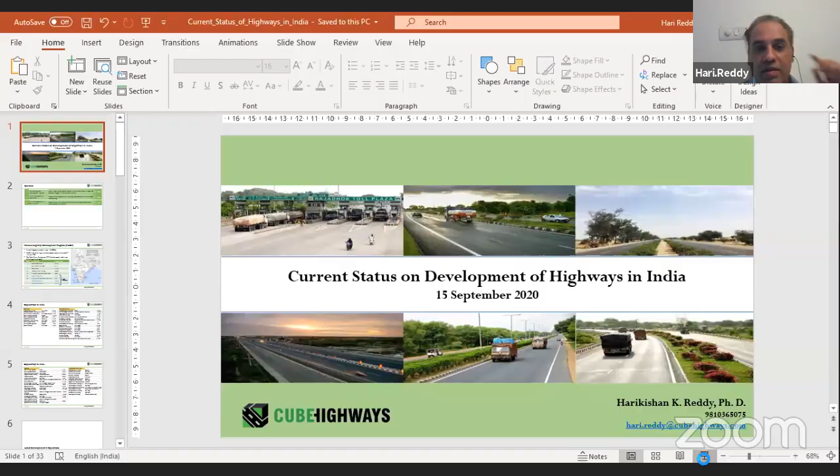I hope everybody can see my screen. So, current status on development of national highways in India - that's the broad topic I had selected, to present what is happening, what will happen, and the scale and size of the highway development we are talking about, not just in the near term for the next few years, but probably in the next 2 to 3 decades. The road building, the national highway building in India, started with a massive and gigantic road building program called the National Highway Development Program.

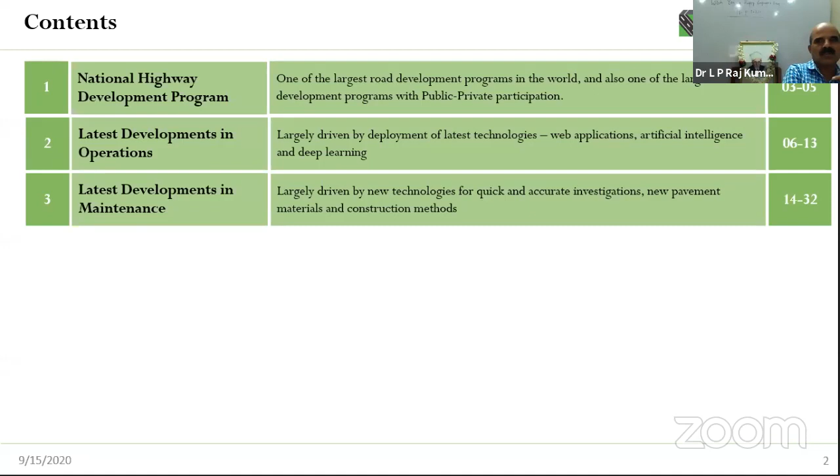It was declared by Honorable Prime Minister Atal Bihari Vajpayee ji, when he was making this speech in the FICCI auditorium, with the plan to develop the Golden Quadrilateral - developing the roads or national highways connecting Chennai to Bangalore, Bangalore to Mumbai, Mumbai to Delhi, Delhi to Calcutta, and Calcutta back to Chennai. That quadrilateral was declared sometime in 1997.

I was in the Central Road Research Institute for a certain activity, so with the head of the transportation department, I was fortunate to attend that conference in FICCI. Everybody, 99% of the people, including people from his own party, said this is another grand announcement and nothing is going to happen. The plan was to build about 5,500 kilometers of road with partial access controlled, completely divided carriageway.

It was a dream then, but it was completed in a defined time frame. Since then till today, we've constructed more than 50,000 kilometers of road network, and probably we have to construct another 100,000 kilometers of road network, including equipping all this network with the latest gadgets and electronics to improve safety on Indian roads.

As we speak, Indian roads are the second largest reason for deaths in India - all diseases and age put together, and after that, roads kill the highest number of people. So therefore there is enormous amount of work yet to be done on improving the safety of our national highways. I'll present some brief statistics on NHDP and other programs underway now to present the scale and magnitude of highway construction taking place.

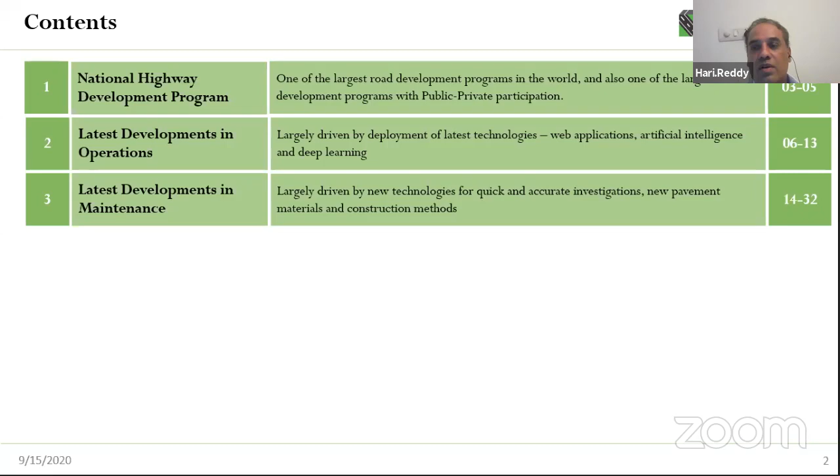This should give enough motivation to all these youngsters on the call to pursue careers in highway engineering if that interests you. We'll also go over the latest developments we are bringing into the Indian road sector, and some latest developments in the maintenance of highways. Once we construct a road network, the next target is to ensure a certain level of service is offered to the road users.

The screen presents the road development program we have undertaken in the last 2 decades under the National Highway Development Program, NHDP, and its subsequent wings. As I said, it started with development of the Golden Quadrilateral connecting 4 large metros - Chennai, Bombay, Delhi, Calcutta. After completion of that, another massive road development program called North-South-East-West. So if you see in the map, the yellow line connecting these 4 metros is the Golden Quadrilateral.

With successful completion of this program, the 2 important corridors were taken up: North-South, starting from Srinagar going up to Kanyakumari, and Porbandar to Silchar East-West corridor. This is shown in a little dark brick color for the North-South corridor, and greenish for the East-West corridor. That is also complete now.

Then we moved on to a 12,000 kilometers of road network with private sector participation, where a private entity brings in funds, operates and maintains the network over a period of time, generally 20 to 25 years, called a concession period. During that time, the private player, for developing as well as operating and maintaining the project, retains the toll collection, or in some concessions the government pays annuity, which is equivalent to the EMIs we would pay on a home loan or a car loan.

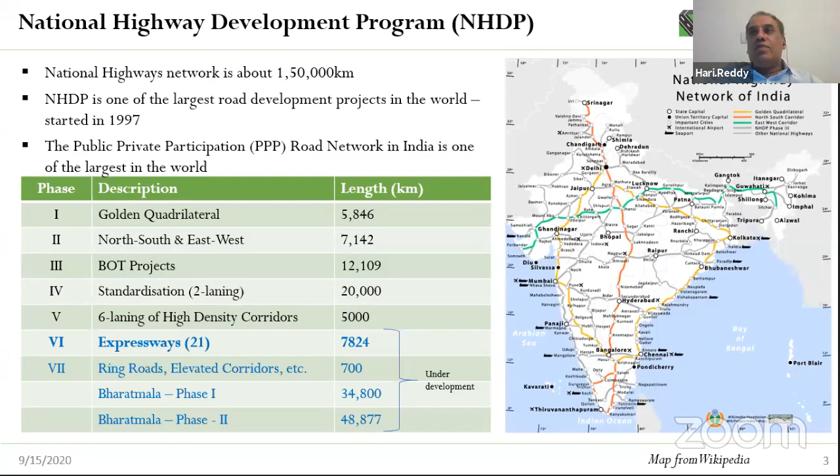And phase 6 is basically expressways, which are fully access controlled, where road development will be truly multidisciplinary, where engineers with computer science, electronics, civil engineering, chemistry - all backgrounds have to work to create a sustainable infrastructure. Just touching base on expressways.

A large number of expressways are already constructed. For someone from Delhi to Agra wanting to see the Taj Mahal, earlier it used to take 5.5 to 6 hours in one direction. So people used to start around 4 o'clock in the morning, and after visiting the Taj Mahal, come back to Delhi at midnight or 1 o'clock. Today, from Delhi to Agra, someone can travel probably in about 2 hours. So there is an expressway connecting. Like that, there are a large number of expressways already constructed.

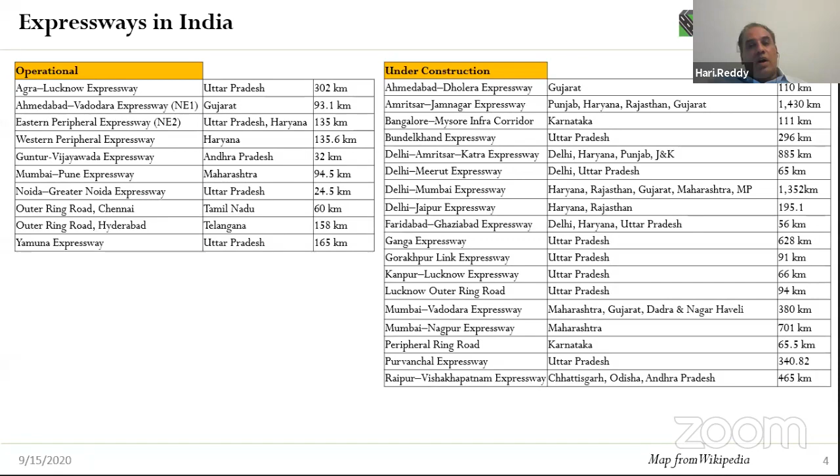While the current government plans to complete this in the next 4 to 5 years, I think this current construction program takes approximately the next 1 decade from now. So therefore, an enormous amount of engineering input, engineering skill set, and technical and non-technical workforce is required to complete these projects. Today, in this gloomy time, infrastructure, particularly civil infrastructure, is one sector substantially providing employment to people in these tough times.

So we'll get to some latest developments. This gives a little bit of a flavor of where we are heading. As I said, transportation or highway construction is no longer pure civil engineering. There is an enormous amount of technology being dumped into highways every day to ensure that the road user gets everything they're looking for, and every stakeholder gets the information in real time on what they're looking at.

Many of you would have seen when you cross a toll plaza on a highway, you get to your wallet and pay cash. Today we are moving to cashless transactions, a whole lot of cashless transaction schemes. That's what we are working on. So enormous technology is being used to ensure transactions at toll plazas become faster and give that level of service to the road user.

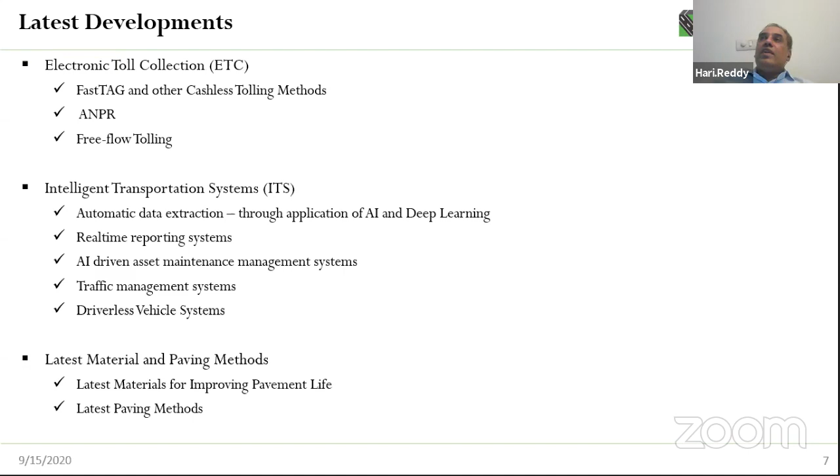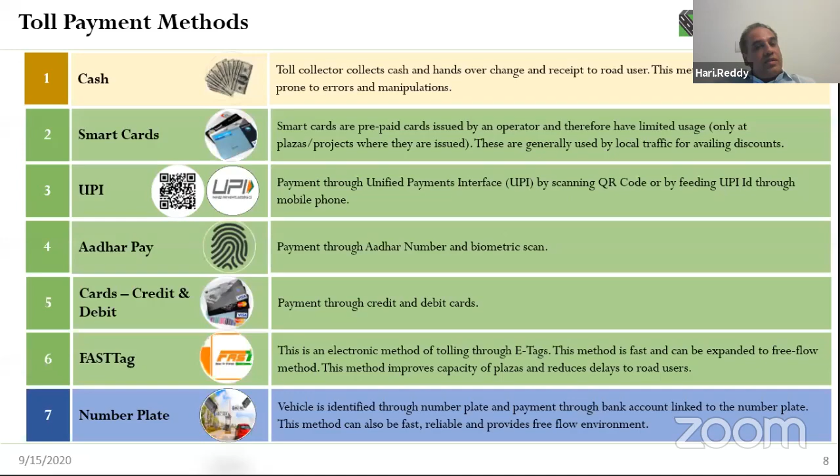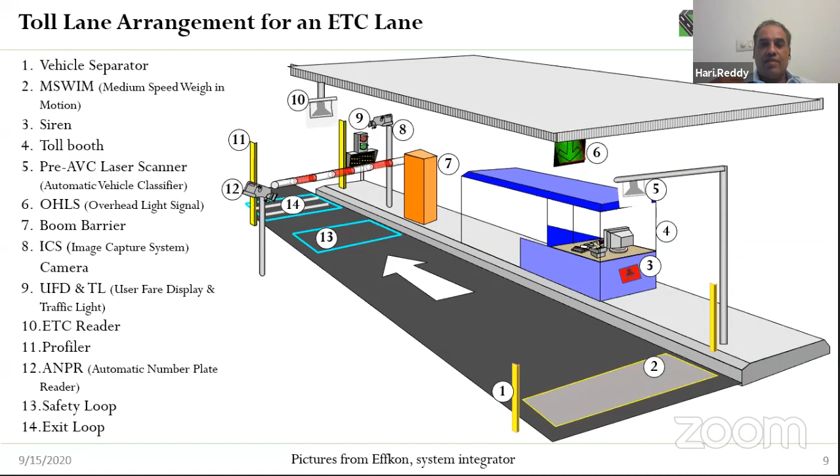As I said, out of the methods at a toll plaza, we always used to pay cash. So we have smart cards today, we have UPI - unified payment interfaces through mobile wallets. A person can pay through Aadhaar Pay, or through cards, credit as well as debit. Then there are FASTTags and number plates. So this is some architecture - I'll circulate this later. A vehicle comes, it automatically identifies the vehicle, deducts money, and you can go away.

Just to present a few snapshots in terms of what all engineers of all specializations put together - the intelligent transport system brings all the information that is on a road to a centralized place called a control center, processes the data, creates information, and sends it to all stakeholders.

For example, there is an accident on the road. If somebody travels to North India in December or January, there's a lot of fog, there's a breakdown vehicle, visibility goes down, and civil engineers understand your stopping sight distances are not available. So somebody comes at speed and bumps into that, and then somebody else bumps into that too. Last time on the expressway between Delhi and Agra, there were 80 vehicles piled up in one accident.

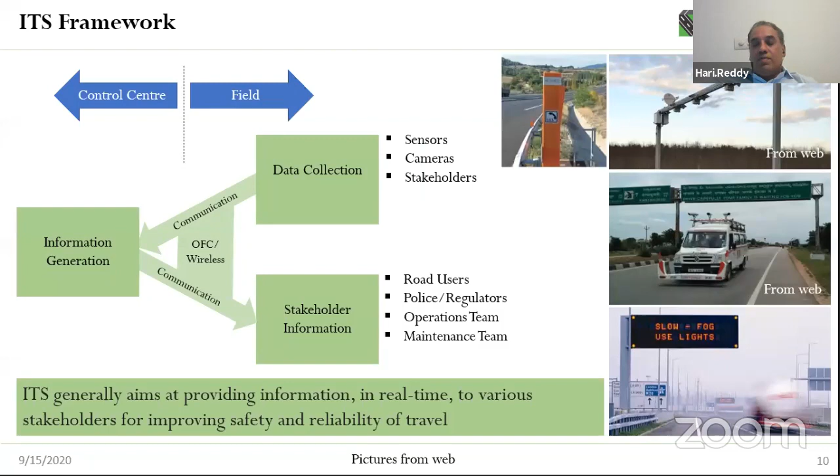So how do you send this information in real time to road users that there is an accident ahead? There is enormous technology being used through sensors, cameras, and today mobiles too. You create a channel where somebody can send information that there's an accident. It goes to the information center, which is a control room, comes to the field, and decisions are given to road users and all stakeholders to react to.

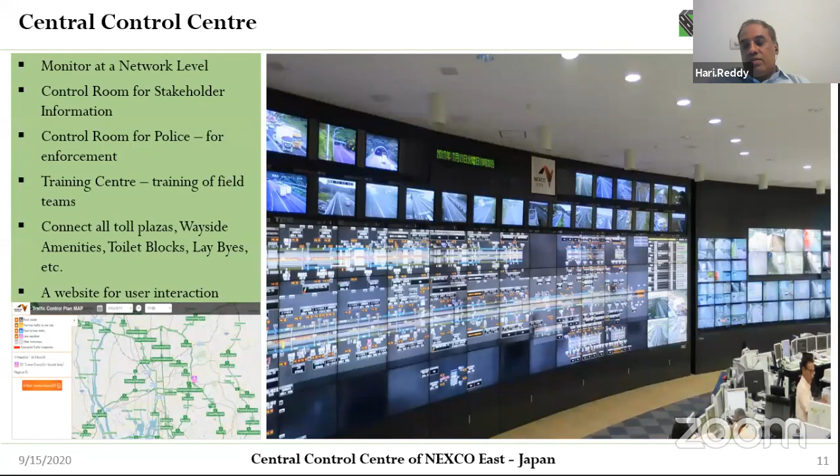So you are able to spot and address it much before you actually find a pothole on the road. The middle screens present the traffic situation - congestion, accidents, breakdowns, unauthorized parking, somebody coming in the wrong direction. Everything is in real time, and this is not fiction or a story - this is being installed on Indian national highways.

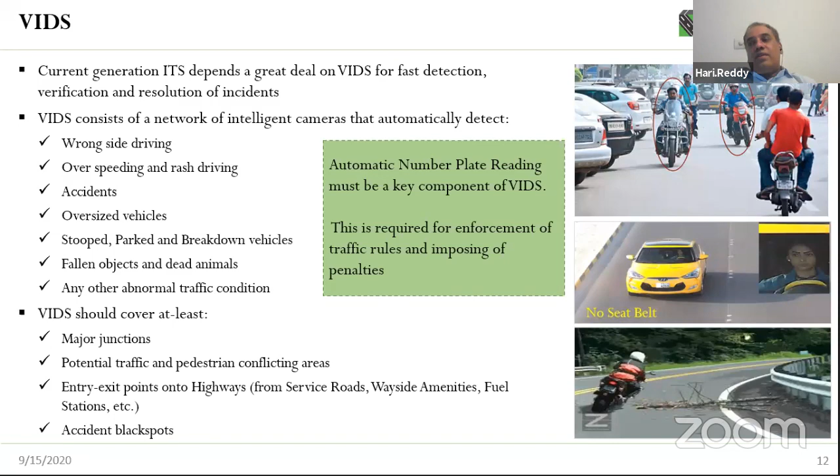You can send a challan to the vehicle owner's house. There's a site in India now called Vahan, where basically every vehicle is registered. If your vehicle's address is not found in the Vahan database, your vehicle will not be allowed to travel. So there's a lot of things happening with VIDS.

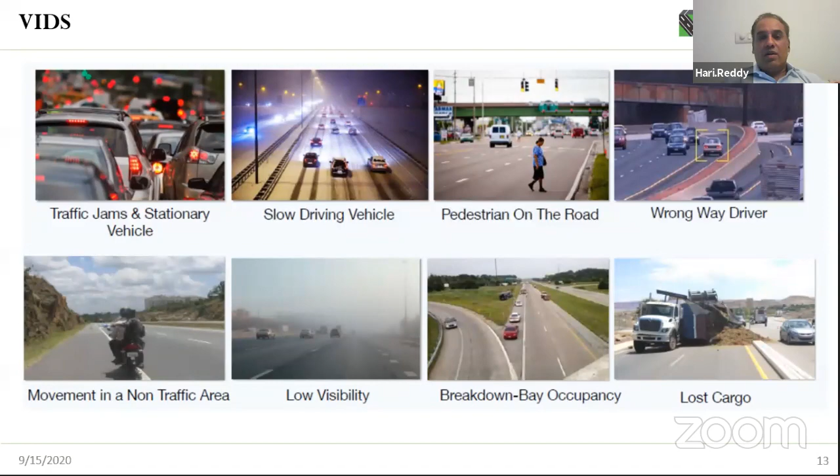So we'll get quickly to what we are doing on maintenance. Typically in India, till about 5 years back, somebody had to inspect the road and see what the problem is, and decide what needs to be done. Now we are moving to a completely instrument-based approach.

When I studied at a government junior college in Hanamkonda, there used to be a big hill right next to the college where I did my 11th and 12th class, what we used to call intermediate at that time. Recently I was going there and that hill had vanished, it's not there anymore. Similarly I see so many hills are not there. Where did they go? Basically people crush those mountains to create aggregates and construct roads.

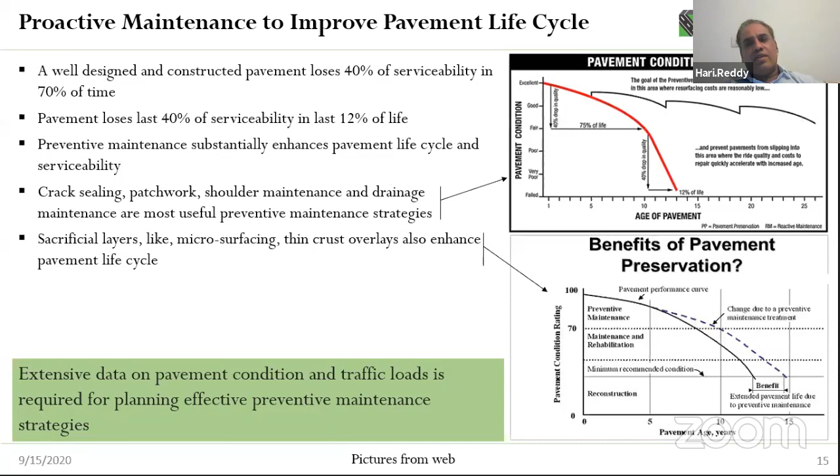After 5 years or 3 years, the road goes bad again, so you crush another mountain and rebuild it. So there's tremendous technology penetration needed to conserve these resources. By taking care of the road with timely interventions, you reduce the pressure on these resources, and we are also getting into recycling. There are so many technologies, which I'll present later, for how you can actually conserve these resources.

All of this is being practiced on Indian roads. This is not something we just picked up from what others do. So, the quality of engineering today is almost at par internationally. In terms of planning, we are probably a little bit lacking, but we will catch up very soon. Overall we are at par with the international industry.

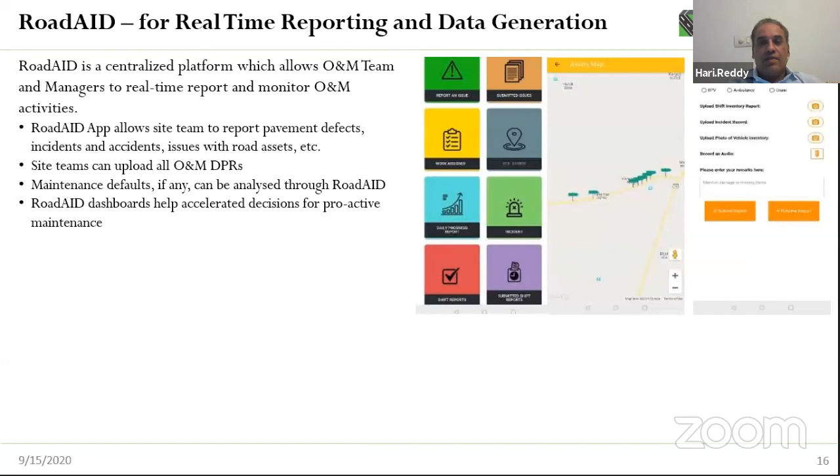There's something we deployed at Cube called RoadAID. This is a mobile application through which anybody can report anything - a signboard missing, a pothole, rutting, raveling on the road, waterlogging, or a signal not working. A person can pick it up, and whoever reports it, you can see on the picture, a maintenance engineer or operations person can go and repair or replace it. So it is real time.

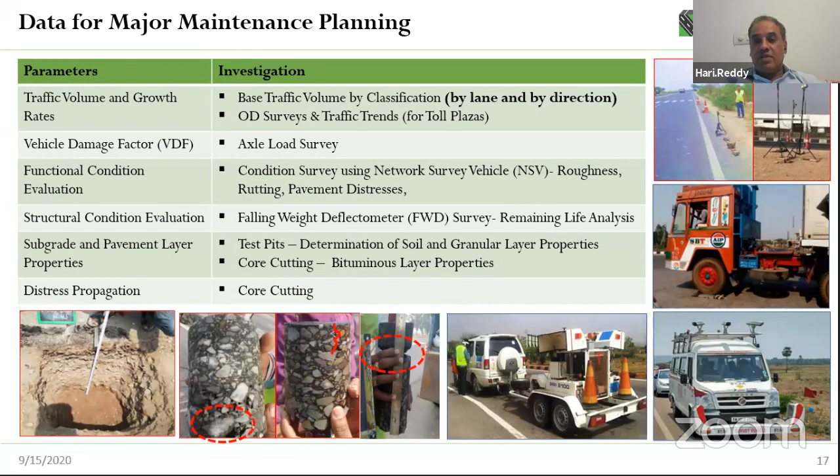Now you can actually predict that condition without actually getting into dismantling. These are called non-destructive testing methods.

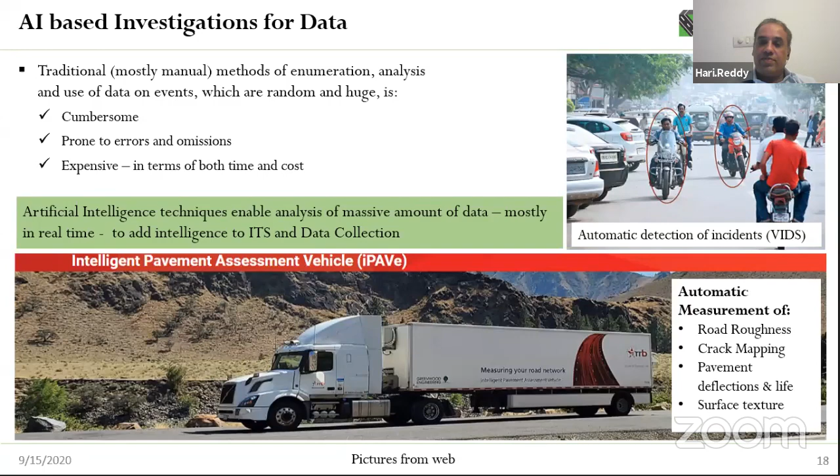In civil engineering, we are now using enormous amounts of artificial intelligence and artificial neural networks to identify issues in traffic flow and on the road. We have used and are using genetic algorithms to predict the bottom layers' characteristics without actually digging the layers. We are using fuzzy logic, building algorithms to automatically determine what treatment should be applied for a given condition. Boolean logic doesn't work because you need a very large number of rules, so we're moving to expert systems and fuzzy logic to automatically create maintenance budgets and maintenance intervention processes.

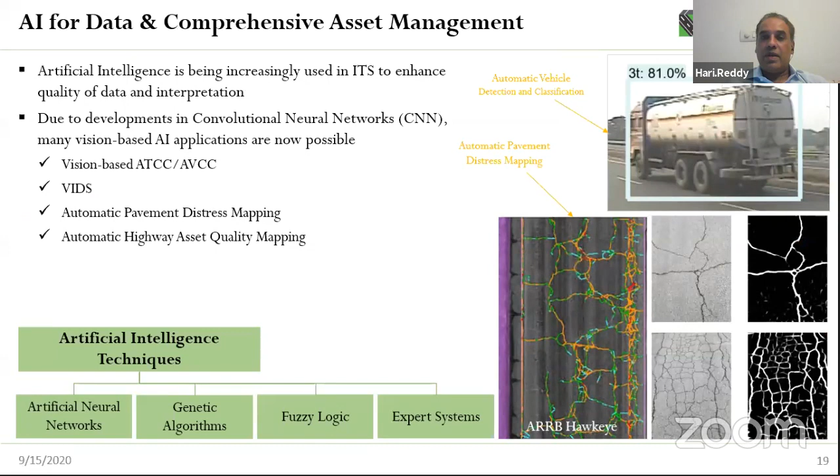This is contrary to the government hypothesis that we should create work. Of course, this technology is disruptive, it's going to take away a lot of jobs, that's for sure. But of course, it will create many more things that we can do.

So there is a nice video. Let me check my time, because I'm already... I have to leave.

This is something which we created in this country. Every time a vehicle goes, it counts and classifies and presents the data. This was built by me and my son, an opportunity COVID gave us. My son is a computer science graduate, so he was at home, and I said, what will you do in these two months? I said, why don't you develop this?

A truck goes, it's a 3-axle truck, in lane 1. On the right-hand side, this is a dream for a pavement engineer, this data. In lane 1, at 9 o'clock, 19 seconds, a 3-axle truck went, with an axle configuration of 1, 2 - front axle 1 and a tandem axle in the back. Every time a vehicle goes, it's printing this, and there's absolutely no intervention here.

The whole highway industry, not only here but across the world, suffered because we did not have data. So for the first time, through these applications of artificial intelligence, we are able to create this data. This whole AI engine is created by the people at Techniche, which TRD represents. He's going to speak next on structures, cube highways, and our own thought process.

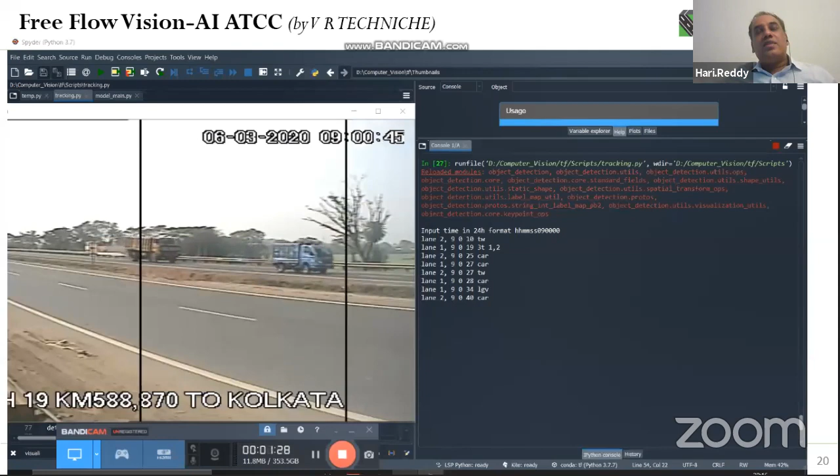There are some more slides I will share, but I don't think we have time to go through them. For all the young engineers or youngsters on this call, you need to know what is for you as a civil engineer. You don't have to join a software company and write code, an Infosys or a Wipro or a TCS, writing code completely unrelated to engineering. There is a huge amount of engineering happening, and this sector continues to provide enormous opportunity for you to express your mind in terms of your intellect and your ability.

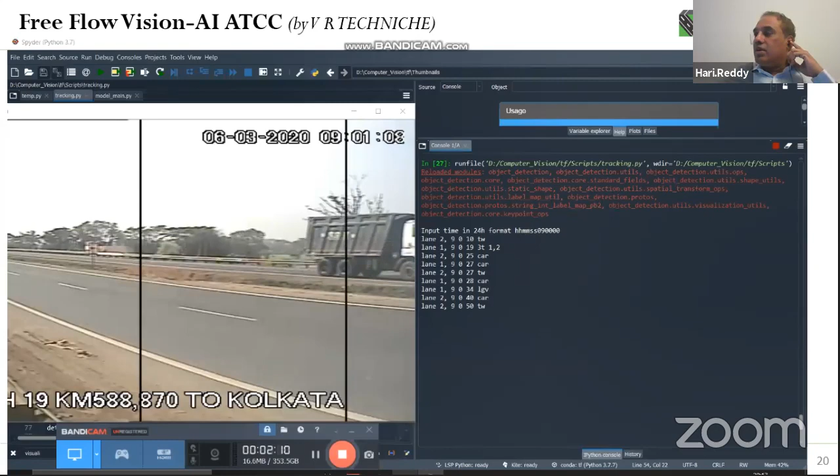So I'll conclude my presentation, and I thank Kakatiya University, Professor Mallareddy, and the other civil engineering faculty for giving me this opportunity. If I had time, I would have spoken about many more things, but this is not the end, so I can come back and have a focused discussion for students whenever you wish.

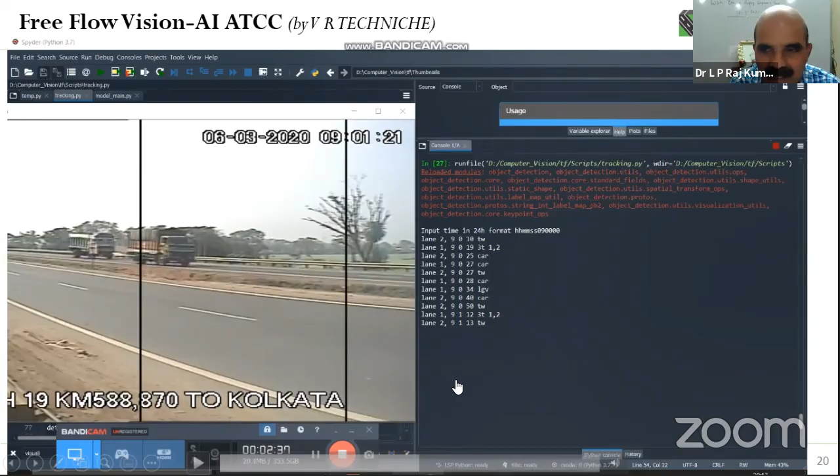Now I request TRC Reddy to present his contents. Dr. Hari has a meeting in the Ministry of Transportation, so he has to leave. Otherwise I would be online, I'd be hearing, but I'll keep myself on mute since I'll be in a vehicle and it might disturb. So I'll be there for the rest. Okay, thank you, Dr. Hari.

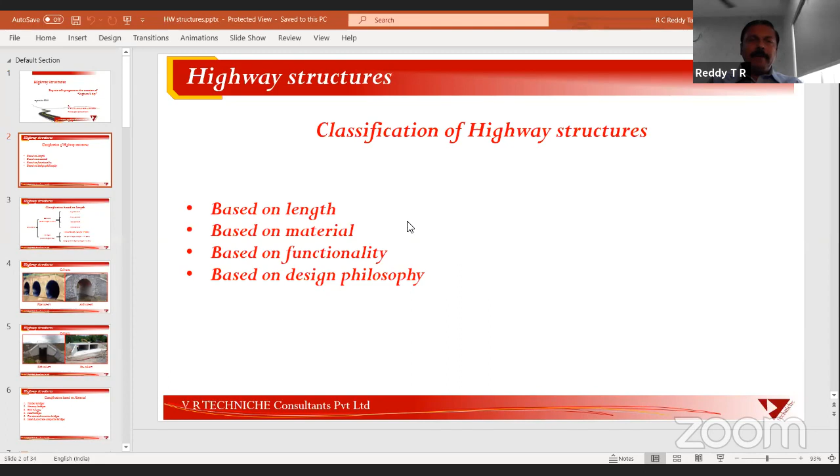First of all, the highway structure can be a bridge, a culvert, or an underpass. I'll explain the classification in subsequent slides. A bridge is a linking between two pieces of highway to overcome an obstacle — it can be a river, another village road, a major district road, a railway line, or a valley. Based on the functionality, the classification is given.

As per the IRC code, IRC 5, highway structures are classified into two broad categories — culverts and bridges — based on their total length. If the total length is less than 6 meters, it is called a culvert; if more than 6 meters, it is called a bridge. The bridge can further be minor, major, or long span, depending on the total length of the bridge, not the span.

In culverts, there are 4 broad types used in our highways across India: pipe culvert, arch culvert, box culvert, and slab culvert.

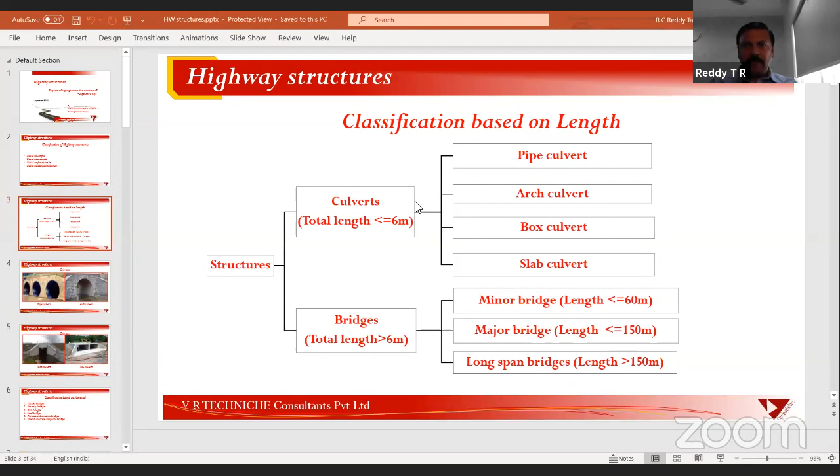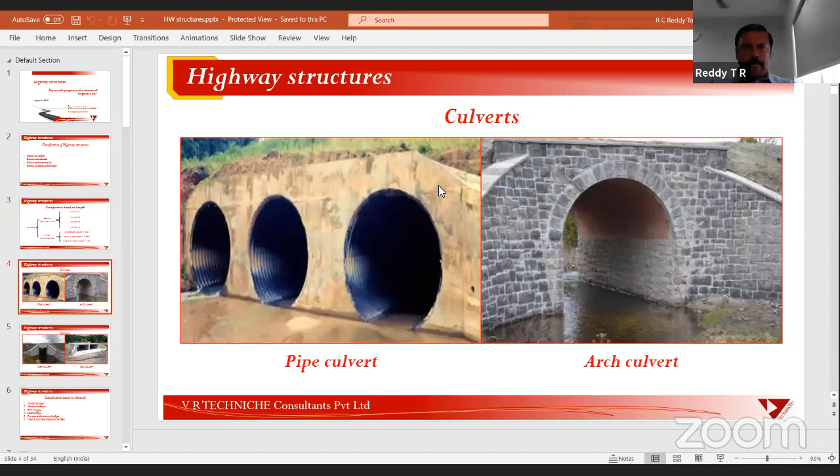A slab culvert differs from a box culvert in that the top slab is not monolithic with the abutment walls or side walls — it is simply supported on the side walls, so it's called a slab culvert. Our old structures are mostly slab culverts, whereas now, for economy, current-day concessionaires and EPC contractors are going with box culverts.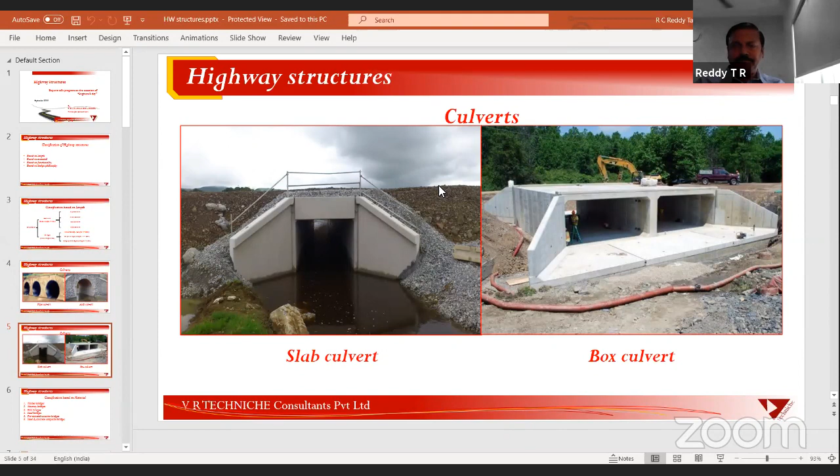Bridges are mostly classified broadly based on the material used in the bridge. It can be a timber bridge, but timber bridges are mostly used for temporary conditions. There are also masonry bridges, RCC bridges, steel bridges, pre-stressed concrete bridges, and steel and concrete composite bridges.

Even today there are several masonry bridges — it's like a composite structure where the substructure foundation is masonry and the superstructure is a solid slab. Such structures exist across India in several thousands.

Then RCC bridges, as usual, are a predominant category on Indian roads. And steel bridges — the choice again depends on the span, availability of material, and the time span for construction.

For pre-stressed concrete bridges, if the span is more than 25 meters, most concessionaires and EPC contractors resort to pre-stressed concrete I-girder bridges. There are also steel and concrete composite bridges.

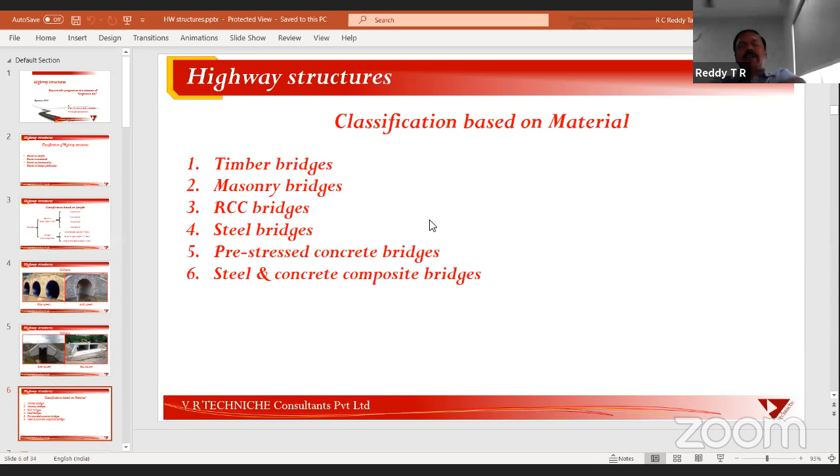For railways, it has recently been made mandatory that the obligatory span — the span crossing the railway line in ROBs — should invariably use steel girders placed below a composite deck slab. So steel and concrete composite bridges are widely used for railway bridges, particularly ROBs.

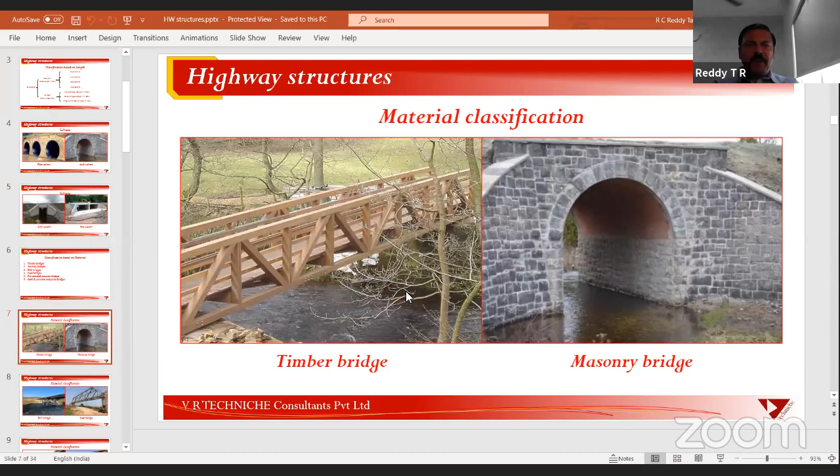This is a typical example of a timber bridge and a masonry bridge. Then the RCC bridge on the left side of the slide, how it looks is a column type piers and girders, deck slab, and the steel bridge.

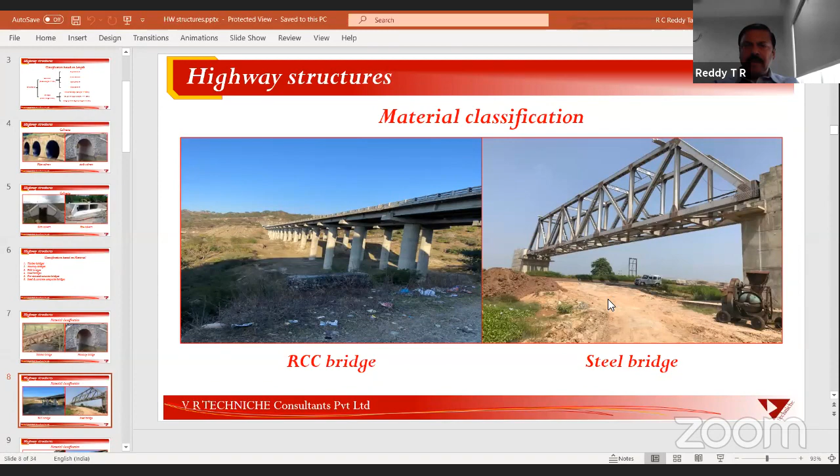The pre-stressed structure looks similar to RCC bridge. Only thing is, if the span of the bridge is more due to the requirement, then the depth of girders will be considerably high, which results in rise in the embankment height and a reduction in the clear height available for the water flow or the headroom for the vehicles. So we will resort to the pre-stressed concrete girders.

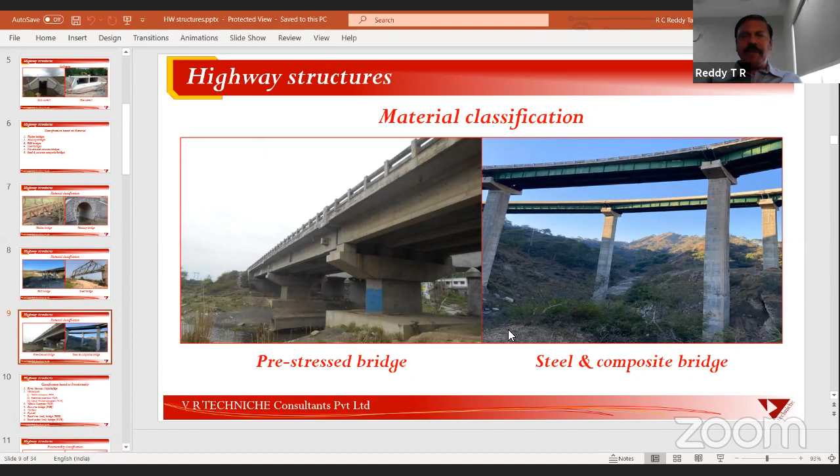Then the steel composite we use for long spans and lightweight, so particularly like in valleys in Jammu region, they mostly use steel composite structure so that the lightweight can handle lifting very easily at such large heights.

Then the classification of structures is also done based on functionality. If the bridge is constructed to cross a river by the road, it is called a river bridge. Again, it can be major, minor, or large span bridge, depending upon the total length and span.

Then the underpass. It can be vehicle underpass, predominantly used for vehicles, and pedestrian underpass, cattle or wildlife underpasses. We have constructed elephant underpasses in Orissa, and camel underpasses in Rajasthan. That's why authorities insist on constructing wildlife underpasses in forest zones or wherever there is data about wildlife crossing the road.

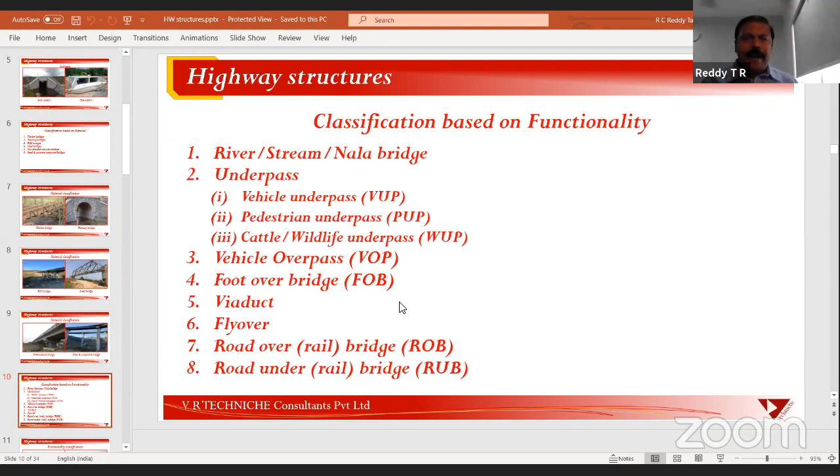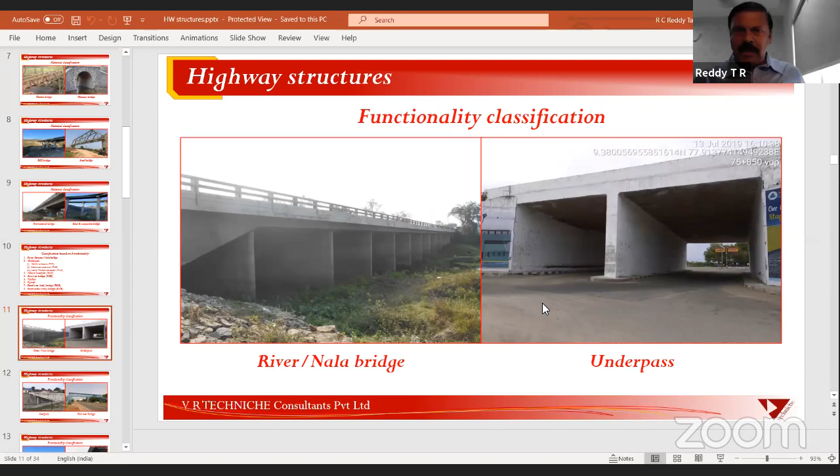A few examples and photographs: on the left side slide is a river bridge, and on the right side is the underpass - a 2-cell underpass for bidirectional traffic. Then the overpass, where the project road goes down and the cross road goes above the project road - that's the overpass. Then the pedestrian overbridge with a steel truss bridge.

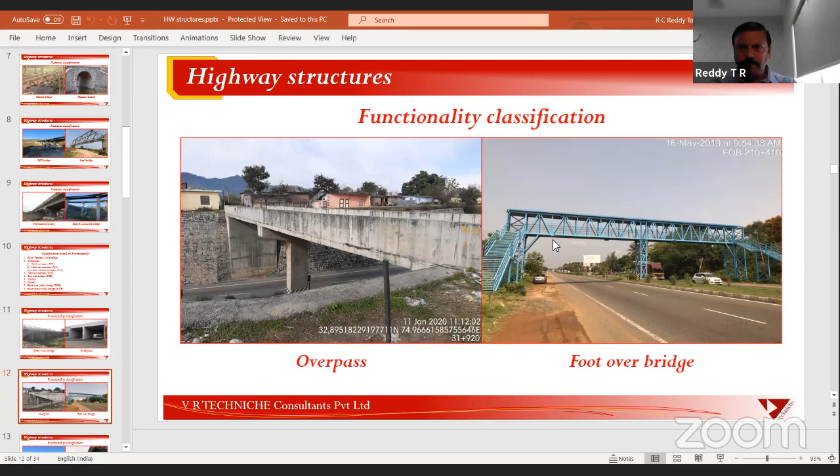For pedestrian bridges, mostly we choose steel truss bridges because of its simplicity and ease to erect without closing the live traffic, except blocking the traffic for a few hours in the night time.

Then the viaduct, you can see, is used to cross a huge valley. It is there, I think, in Gujarat. I think we have done a due diligence for this project.

Then it's a flyover in urban areas where the busy junction is to be crossed by the high traffic road. A flyover is constructed either for unidirectional or bidirectional traffic.

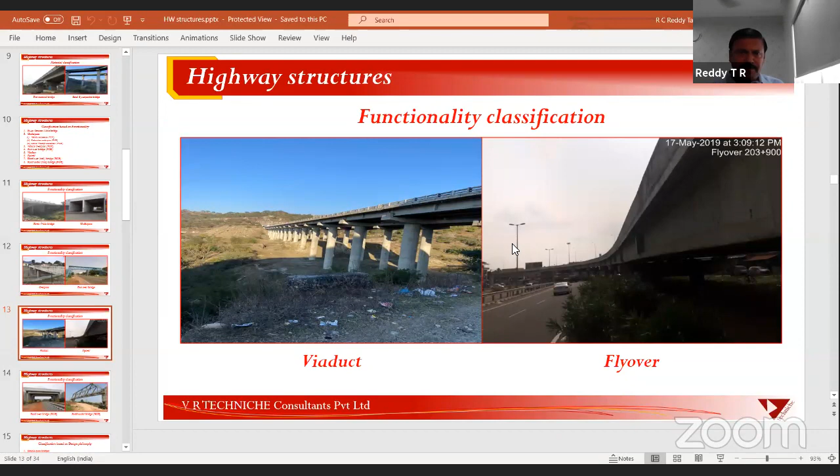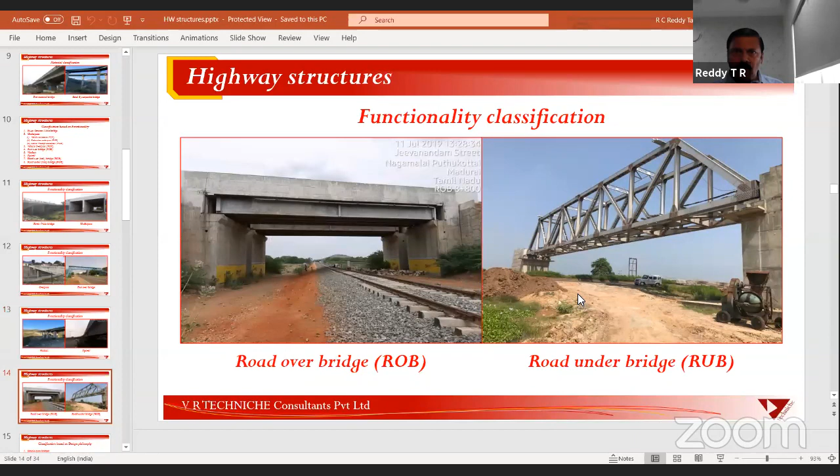Then the ROB, the left side photo is the ROB, road over rail bridge. The right side is RUB. Above, the rail track is passing on top, and the road is going down. Then comes the final classification, based on design philosophy.

Whether it is a simple span bridge, a continuous bridge, an integral bridge, arch bridges, suspension bridges, cable stayed bridges, or extra dosed balanced cantilever.

Simple span bridges are widely used in our highway construction because of their simplicity in construction, design and implementation. It is like the construction of two piers or abutments and placing on it a superstructure of slab type, or girder and slab type, or wide slab, anything.

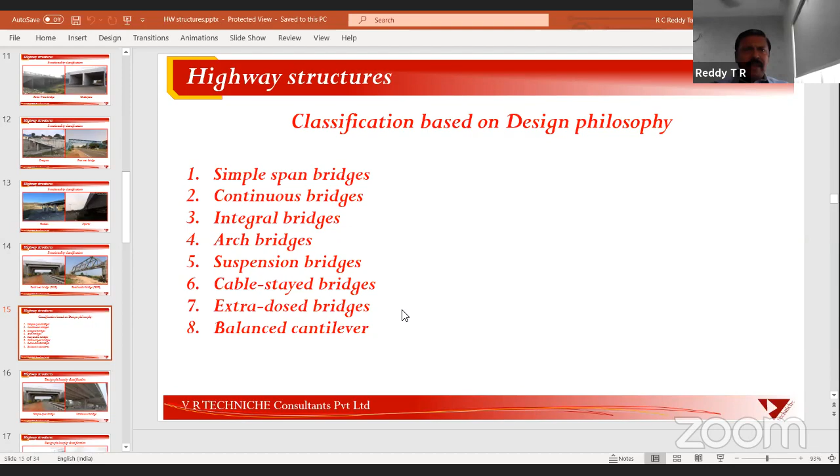And continuous bridges are - the simple span bridge you see on the left side, which is resting on bearings for horizontal movements and rotation. Then on the right side is a continuous bridge. It is monolithic with the pier cap at the intermediate piers.

So the continuation can be 3 spans or 4 spans, depending on the design concept. The expansion joint will be after 3 or 4 spans. The location of the expansion joint again is chosen based on the location, because if it is a high seismic zone and we provide expansion joints after 4 or 5 spans, the fixed pier will be subjected to enormous seismic forces, and this foundation will be expensive. Sometimes we have to use deeper piles.

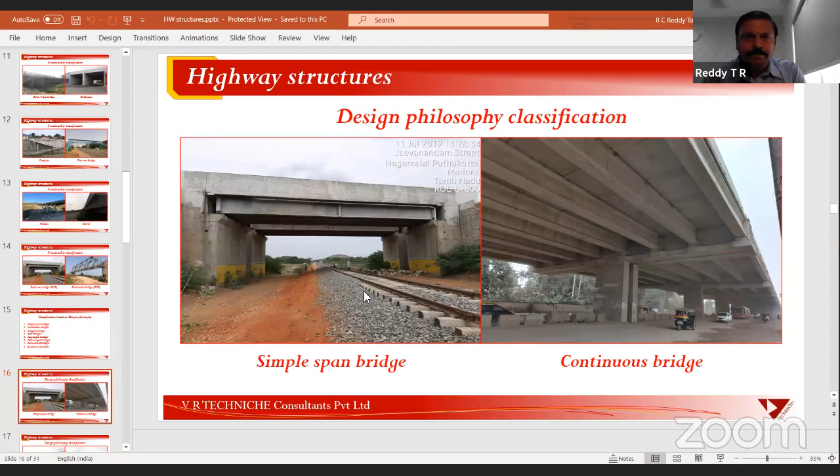Then, integral bridge - on the left side photo, if you can see, integral bridge is nothing but a deck slab monolithic structurally with the abutment walls. It's like a box culvert, it's just a big one. It is an integral bridge.

Earlier our designers were reluctant to provide integral bridges just because it is an indeterminate structure. Manual calculations might have been done before 1970. Now, because commercial software is available for structural design, it's not an issue to design any indeterminate structure. The technology is available, and international reference books are available. So now in India we have also resorted to many 30-meter, 40-meter span integral bridges.

Then arch bridges - the deck slab can be supported on an arch. So there's an arch bridge. These are all design philosophies, meaning how the load of the live loads is being transferred to supports and then ultimately to the ground. That predominantly determines its type. So with the arch action, the loads are being transferred to abutments and ultimately to the soil strata and ground.

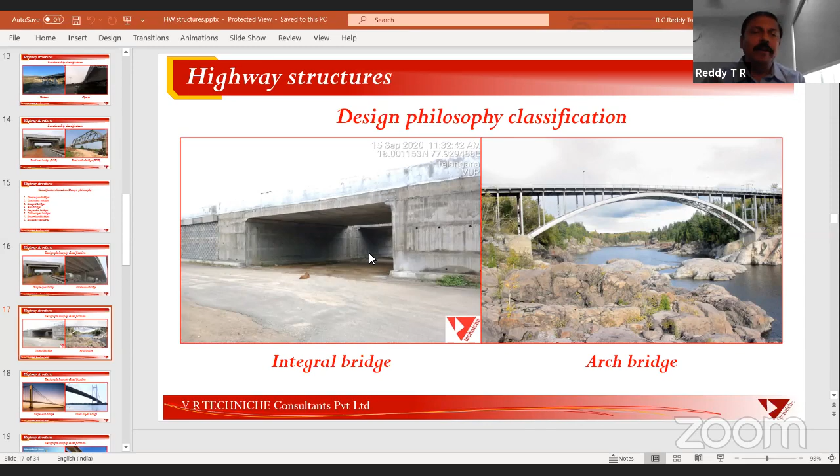Then suspension bridge - to travel and cross large streams, we generally go for suspension bridges. They're expensive, probably 3 times the cost of a conventional bridge.

Currently in India, most highway projects are undertaken either by EPC (Engineering, Procurement, Construction) mode, in which the contractor is responsible for his expenses on construction, or BOT (Build, Operate, Transfer) mode, in which case the NHAI or Government of India will not reimburse the cost of structures. He has to collect toll for the next 20 or 30 years. So what they are doing is not going for specialized or iconic structures. They are going with normal I-girder, T-girder and deck slab, or precast prestressed girders and deck slab bridges. Most contractors are going with this kind of thing.

Unless government comes forward to finance it, the government stipulates in the terms of reference that the contractor has to construct an iconic bridge for a particular river. Most concessionaires or contractors go with conventional, simple structures. That is the reason we could not find many suspension or cable-stayed bridges in India.

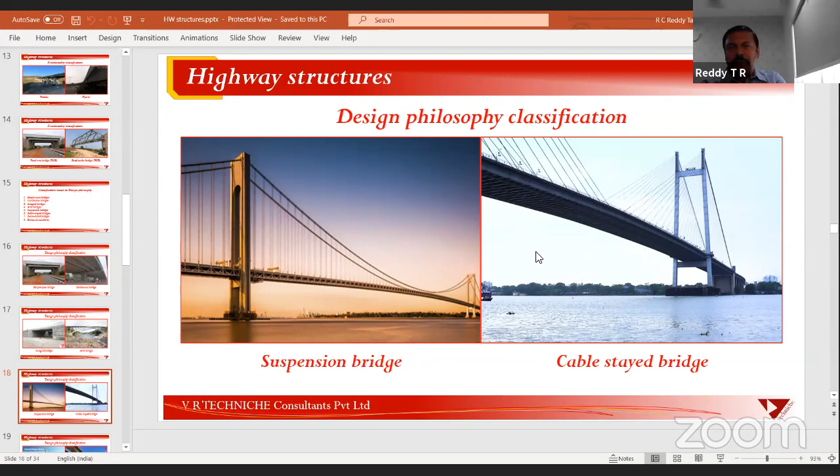Cable-stayed bridge is another large span, long span feasible structure. The extra-dosed bridge is almost similar to cable-stayed, except the pylon height will be less. And the balanced cantilever structure, in which a balanced cantilever is constructed on either side of the pier with a simple joint at midspan.

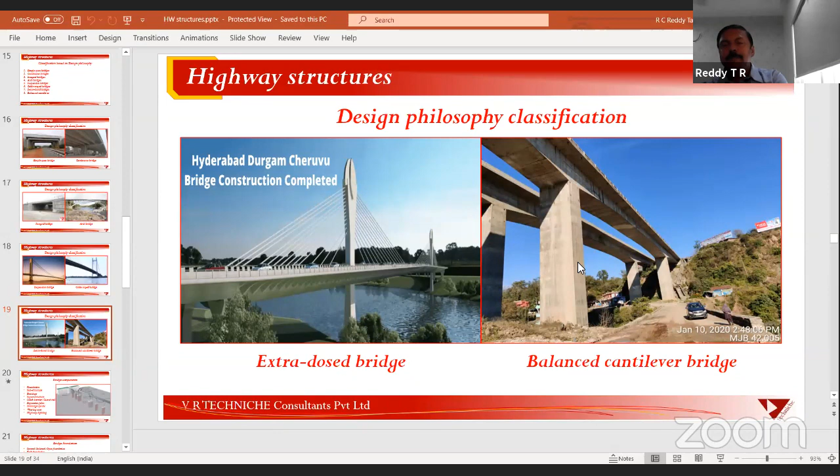So the next item of highway structures is: what are the components of any bridge in highway construction? Basically, there are foundations and substructure. Above the foundation and below the superstructure is called the substructure, and the bearings form the interface between substructure and superstructure. The superstructure comes on top of the substructure and supports all kinds of live loads.

Crash barrier or guardrail is a vehicle or pedestrian restraining protective system placed on top of the deck slab. Expansion joint: for simple span bridges, on each pier top there will be an expansion joint which allows expansion or contraction. The required expansion or contraction is decided based on the length of the bridge and the geographical location of the structure, taking into account the highest and lowest temperature.

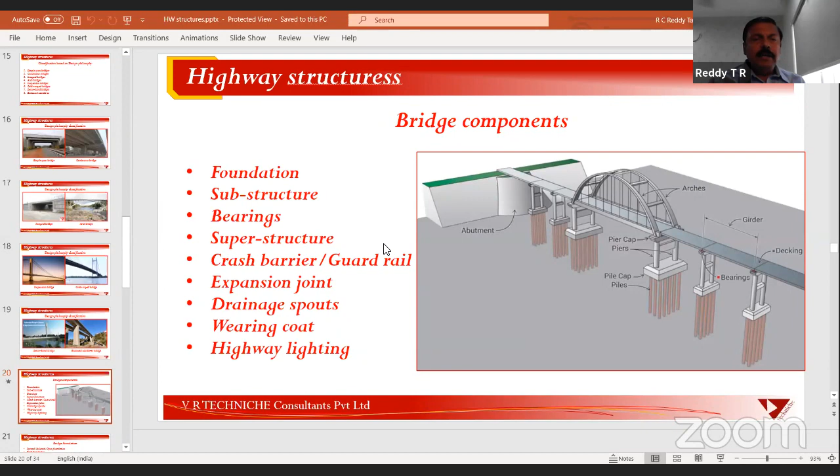If we consider bridge foundations, they can be classified broadly into 4 types widely used in India and elsewhere. Spread footing and raft foundations are shallow foundations. If the subsoil strata is good or adequate to give sufficient bearing capacity for the design of our bridge, then we go for open foundation with isolated footing, maybe rectangular or square, depending upon the shape of the pier or abutment.

Then the raft foundation: if the bearing capacity is less, or if the foundations are merging due to proximity, we go for a raft foundation. And pile foundation is a deep foundation. Wherever scour depth is more, like in major rivers, we go for pile foundations.

Scour depth is more, or wherever soft soils are there, isolated footing is not possible within a reasonable depth of 4 to 5 meters. Excavating 6 or 7 meters is not a viable solution due to collapsing of sides, and the deeper we go, the depth of foundation will be more. So if suitable soils are not available within 4 to 5 meters maximum, practicing engineers across India are resorting to either pile foundations or well foundations.

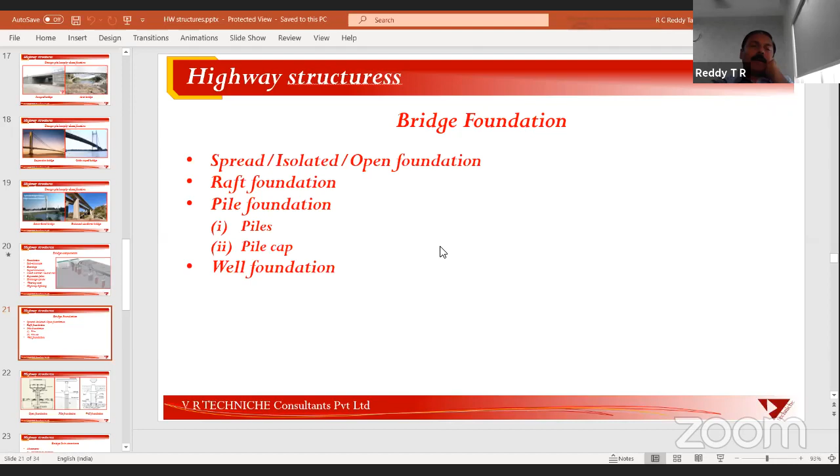These are illustrative photos for some of the foundation types. See the open foundation, where we do the open excavation, then we provide a spread footing. Based on the bearing capacity and the loading, we will design it.

Then the pile foundation. Again, pile can be a friction pile, load bearing or combination, end bearing or friction pile. If the load bearing capacity is obtained by end bearing of the piles, mostly they are called end bearing piles, which we use in hard strata soils at the bottom, where rocky strata is available at a suitable depth. Then the well foundation, the extreme right corner photo, is the well foundation. A typical well foundation looks like that.

It can be an oval shape with a double D, or it can be a circular shape.

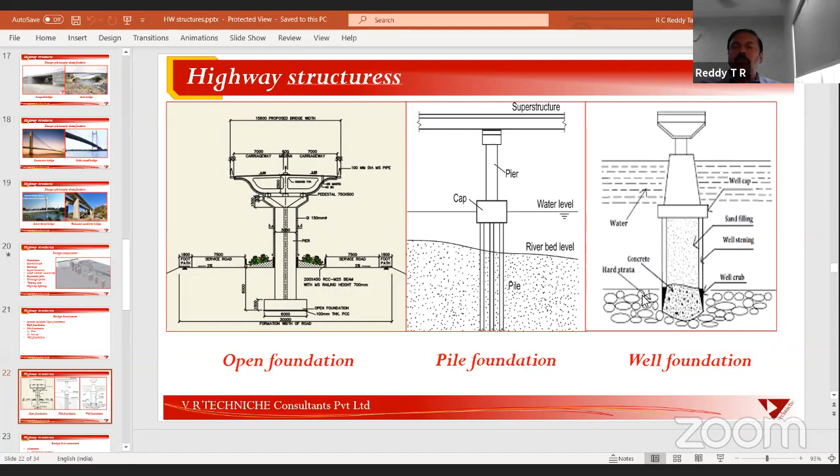Then the bridge substructure, a brief explanation: substructure means it can be abutment or pier. The end supports of the structure are called abutments. If it is spill-through abutment, or wall type abutment, in which case a retaining abutment, approach embankment soil is being retained by the abutment. In this case the abutment will be designed for earth pressure as well as forces coming from the superstructure.

Then the pier is the intermediate support for multiple span bridges. So the bridge can have many spans, not a single span. If it is a single span, on either side it will be supported by abutments. If it is two or more spans, then the intermediate support is called a pier.

It can be a circular column type pier, or a hammerhead pier, or a wall type pier, in which case the wall width is almost near to the bridge deck width, and a portal pier, in which case multiple columns will be tied together with a pier cap and monolithic with the superstructure.

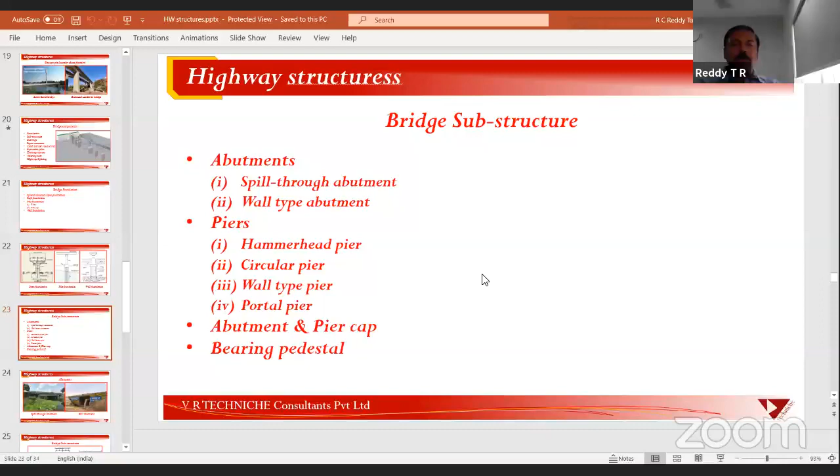Then the abutment or pier cap: apart from the abutment and piers, on the top there is a flaring shape, that is called the abutment cap, so that it can support the adjacent spans. So the pier head is widened to receive the bearings of adjacent spans. That's called a pier cap.

This is a spill-through abutment, in which case the abutment is not retaining the highway embankment soil. The highway embankment soil slope is provided by virtue of the natural slope.

Then the wall-type abutment, in which case return walls are also provided, as shown in the right side photograph. The return walls and abutment together will retain the soil of the approach embankment.

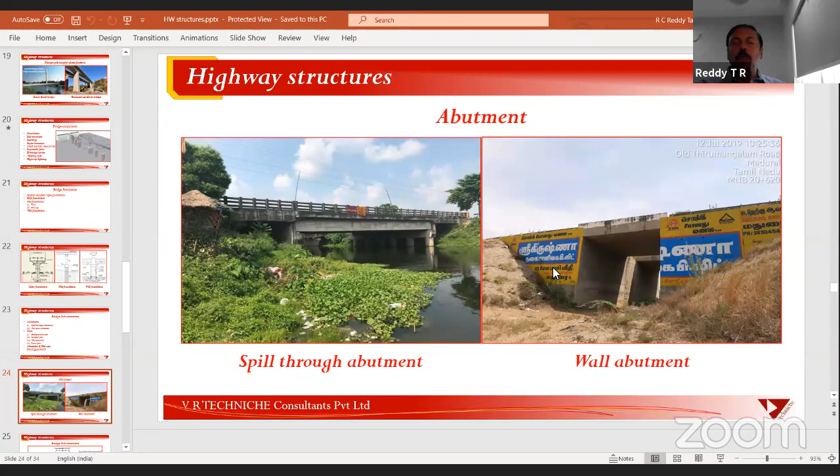Some sketches illustrate the solid wall pier, this is the hammerhead pier, and the rigid frame pier.

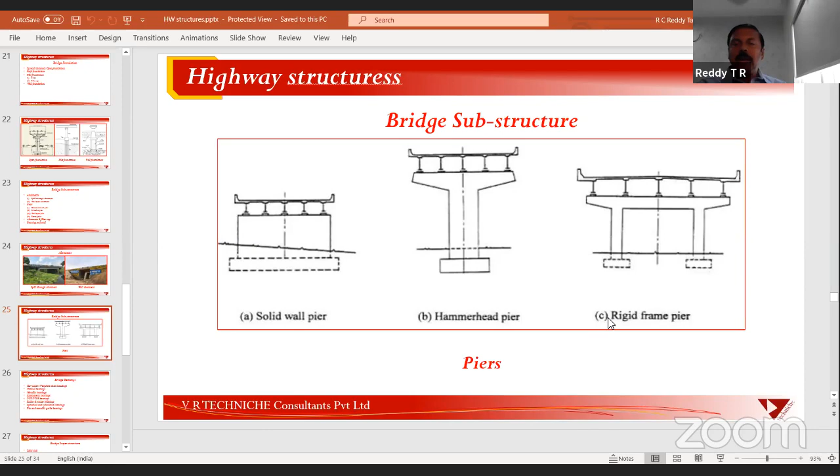Then the elastomeric bearings, like an elastomeric pad, manufactured with multiple layers of elastomer and steel sheets sandwiched in between the elastomeric layers.

Then the pot cum PTFE bearings, roller and rocker bearings, spherical and cylindrical bearings, pin and metallic blade bearings. These are all bearings, an interface between the substructure and superstructure, to transmit the vertical loads at free ends and horizontal forces, and to allow rotation at the support.

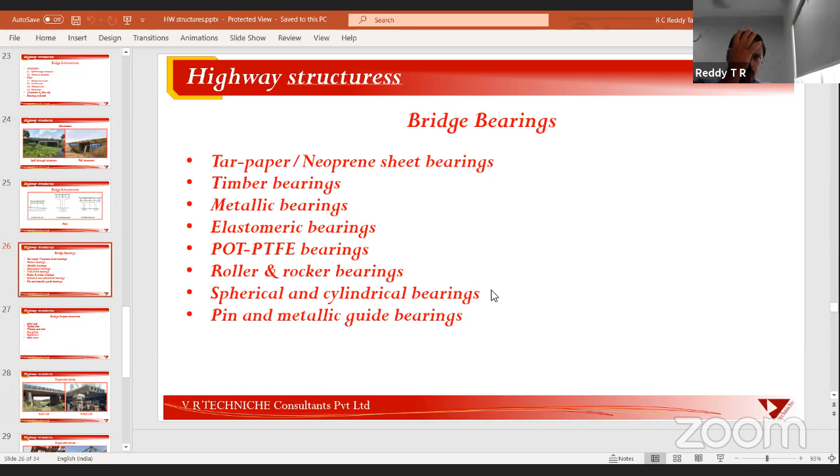Superstructure can be a solid slab, voided slab, a T-beam and slab, box girder, segmental, or steel truss. A solid slab is a very simple structure, like a normal building slab resting on two abutments or two walls. It can be RCC walls or masonry walls. In some old structures, we saw even in Gujarat and Rajasthan, and here too in old structures, brick masonry piers and abutments support the solid slabs.

Then voided slab, to save unnecessary material in the tension zone. At some locations we propose voided slab. Its soffit looks very clean and beautiful. Then voids will be created by virtue of GA big pipes, diameter of 1 meter, 900 mm, 600 mm, and 1.2 meter diameter.

Then a T-beam and slab: the T-beam can be an RCC beam, precast RCC beam, or cast in situ. Precast means there will be a casting yard to save time during construction of foundations and substructure. The precast beams will be cast in a casting yard and transported to the structure location by trailers, then the deck slab will be cast, so a lot of time can be saved in the total construction time. Then the box girder.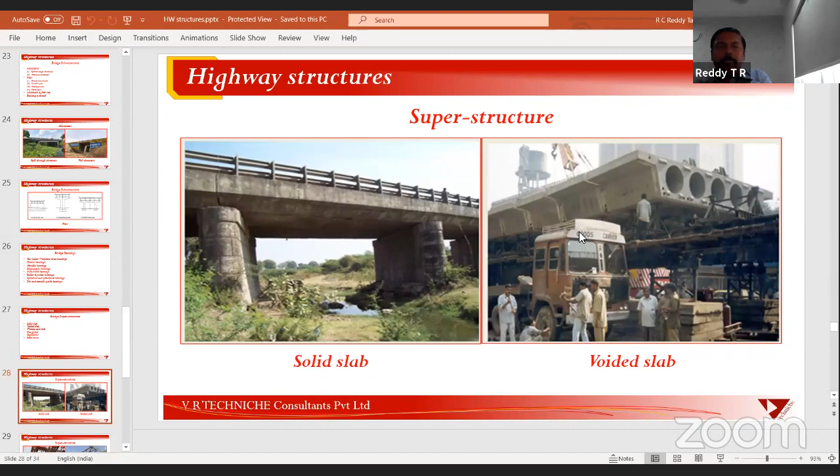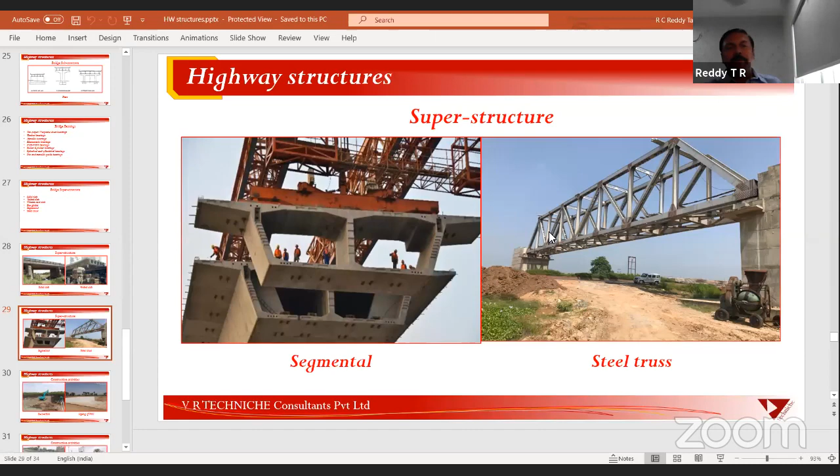Then the segmental, in which case 2.5 to 3 meter segments will be joined together with pre-stressing to form a 30 to 40 meter or 50 meter span - any span can go. Then the steel truss is in the right side photograph.

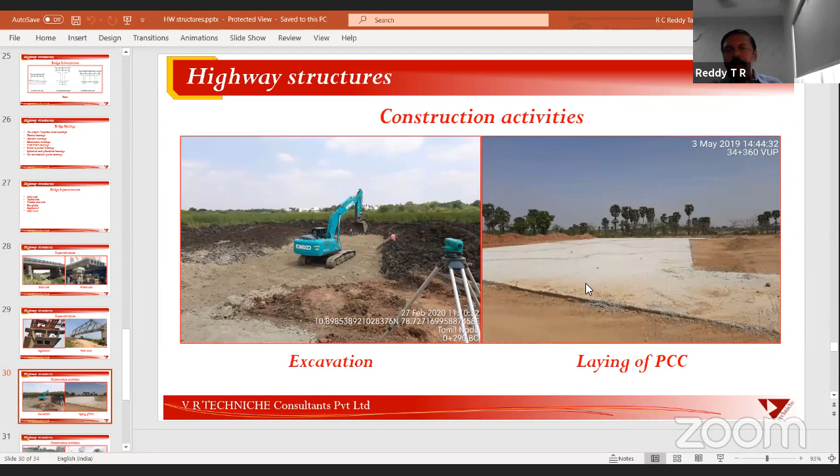These are some of the construction activities as guidance to our young graduate engineers. So earthwork excavation with an excavator is in progress, then laying of PCC, then placement of reinforcement for open foundation. Reinforcement cage is made on the ground with bottom steel and top steel, spacer bars and vertical links, and placement of reinforcement for substructure like a pier, shown on the right side photograph.

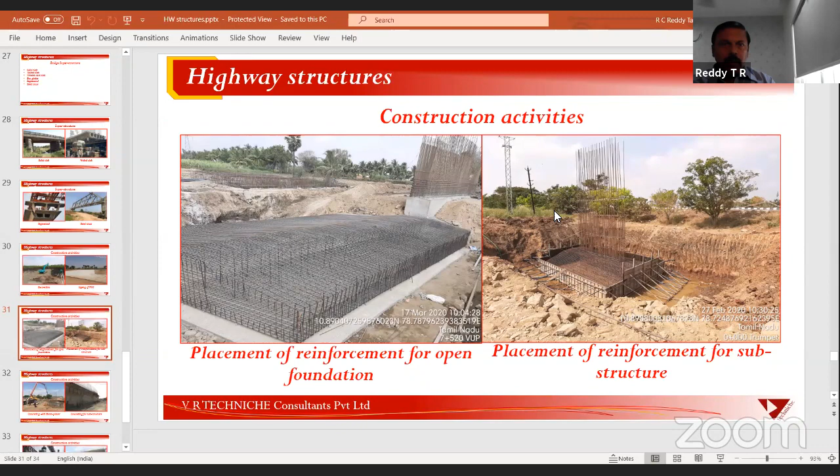Concreting with a boom placer. So nowadays most of our highway works are being executed with pumping only - pumping concrete with ready mixed concrete being transported to site in transit mixers, and using a boom placer, concrete is being placed for all the bridge components.

The concreting for a substructure - you can see any bracket or cantilever projection - rather than putting scaffolding and shuttering supported from the ground, they support it with temporary brackets fixed to the already cast pier or abutment wall.

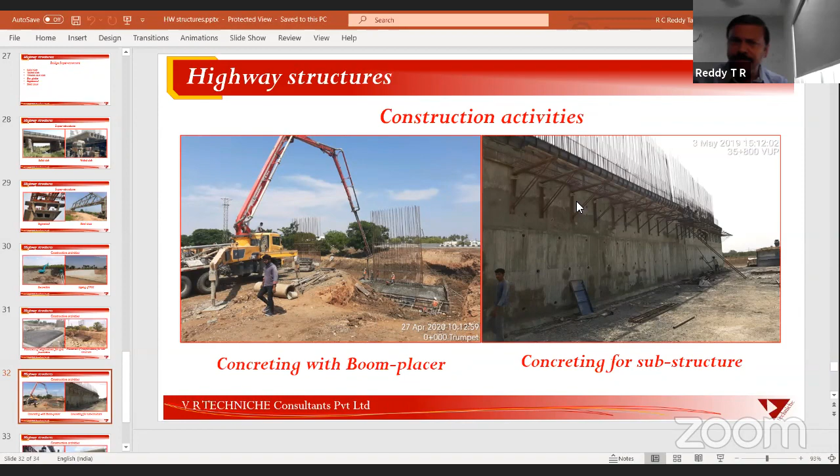Yes, I think I have done with my presentation basically on the highway structures. Thank you to the faculty for giving me this opportunity.

Hello, thank you sir. Yeah, thank you for presenting. Sir? Yeah, I can hear. Thank you, please - sir, thank you very much for your presentation, a very nice presentation. Sorry, here we have a power cut, so something is disturbed here. Okay, we came out. Okay, thank you sir, thank you very much for your presentation. Thank you very much, okay, thank you for giving me this opportunity. Bye, yeah, thank you sir.